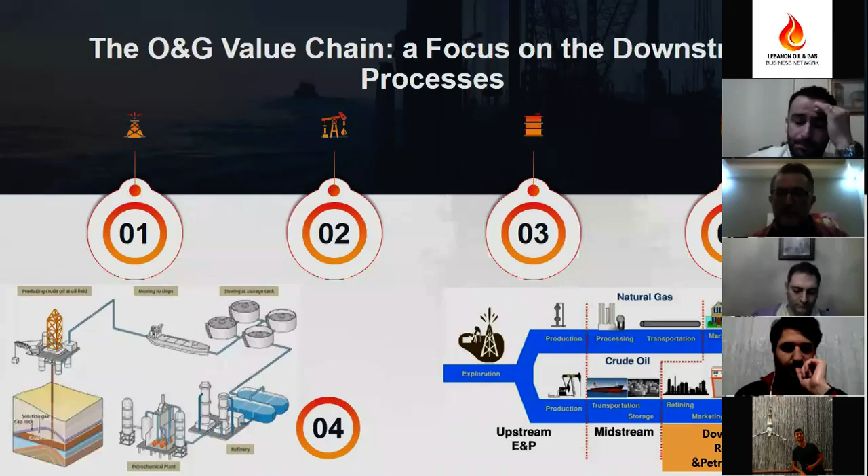However, we have some non-hydrocarbon products like sulfur, nitrogen, oxygen, and metallic components. Some of them are responsible for the deactivation of catalysts in the refinery and will cause pollution after combustion or use of crude oil. So as you can see from this introduction, crude oil in this form is non-valuable. I can't use my crude oil in my engine or in my petrochemical industry directly, so I have to treat it before going to the end-use product, whether crude oil or natural gas.

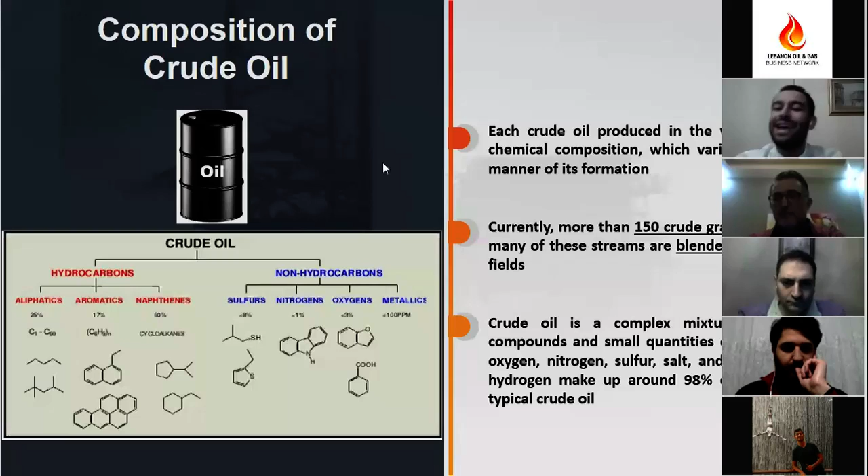So each crude oil produced in the world has a unique chemical composition, which varies according to the manner of its formation. Currently more than 150 crude grades are traded, and many of these streams are blended from 2 or more fields. So as I said, crude oil is a complex mixture of hydrocarbon components with small quantities of sulfur, oxygen, and nitrogen components called heteroatoms. Carbon and hydrogen make up around 98% of the content of typical crude oil.

So what can I do with my crude oil? Two things. First is the production of fuel like gasoline, diesel, or jet fuel, called material for the transportation sector - up to 80% of the product in the refinery is used for the transportation sector. The other part, the liquids produced in the refinery, are used in the petrochemical plant in order to get plastics, cosmetics, hydrogen, syngas, and other components.

So crude oil first enters a refinery. I get product for the transportation sector and another product called feedstocks, or the raw material that should be used in the petrochemical plant in order to get the final product.

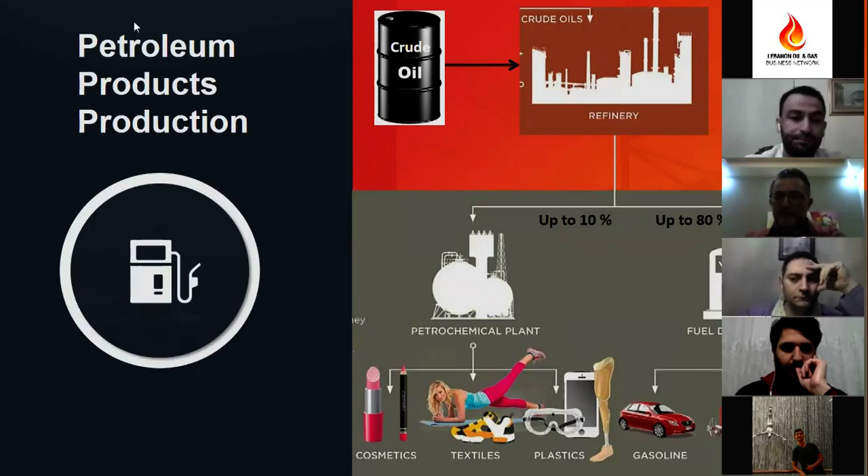Now, what is in a barrel of crude oil? One barrel equals 42 gallons. If you use US refineries, some advanced refineries, we can transform our barrel of crude oil into valuable products such as gasoline, 20 gallons, distillate or diesel, 12 gallons, jet fuel components, and other products.

So the first part of transformation is related to the transportation sector. The other part, like 6 gallons, these products are liquids used in the petrochemical industry to make a variety of chemicals and plastics. This transformation of crude oil into valuable products will depend, first of all, on the modernity of the refinery.

Which means, do I have some advanced equipment like catalytic cracking processes, thermal cracking processes, delayed coking processes? It also depends on the type of crude oil and the percentage of sulfur.

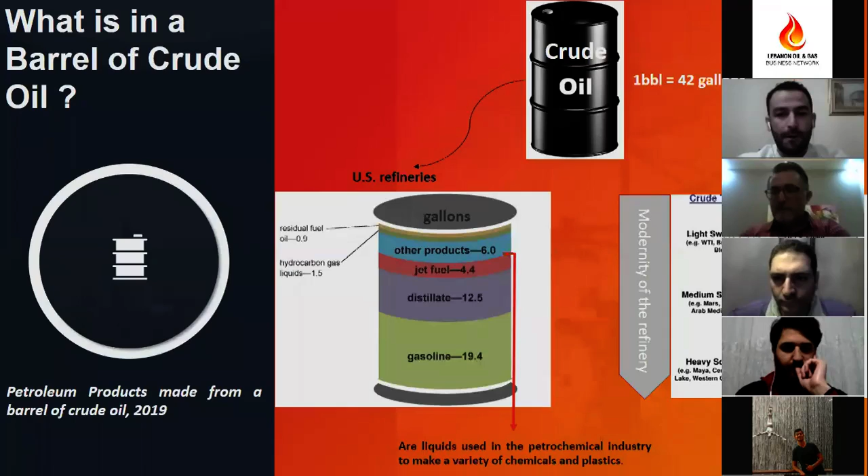Light crude oil, medium crude oil, or heavy crude oil. So this percentage of gallons in a barrel of crude oil may be different based on the type of crude oil and the modernity of the refinery.

So the first part, I repeat, how to valorize my crude oil. My crude oil is transformed into all these petrochemical products: plastics, syngas, cosmetics, rubber, etc.

The International Energy Agency estimates that more than a third of gains in oil demand by 2030 will come from petrochemicals. The other part of crude oil should be used mainly for the petroleum or transportation sector: gasoline, diesel, and jet fuel.

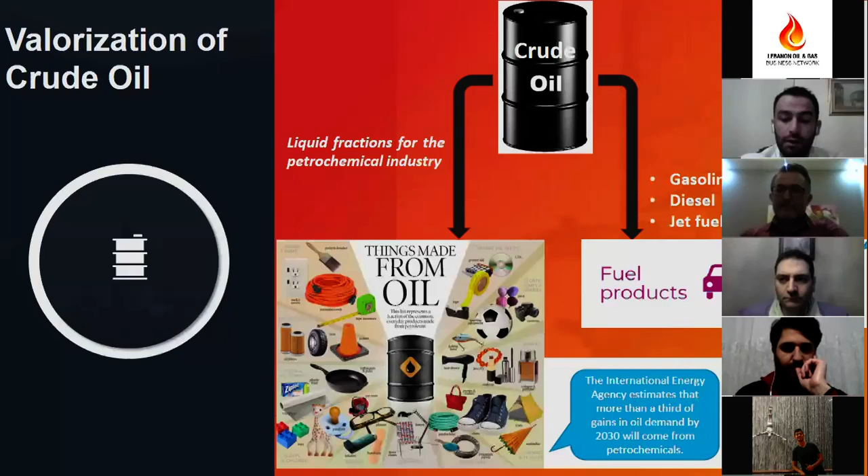How can we transform all this non-valuable crude oil into some valuable petrochemical or transportation sector product? By entering the refinery.

So regardless of the source of my crude oil, it can be light, medium, or heavy. All crude oils can enter a refinery in order to obtain all these final products: LPG, liquefied petroleum gas, gasoline, jet fuel, diesel, heavy fuel oil, and others.

Some liquids like naphtha are obtained in the refinery by a process called catalytic reforming process. Some naphtha are transformed into petrochemical products by steam reforming or steam cracking process, and this will be discussed in the coming slide in this lecture.

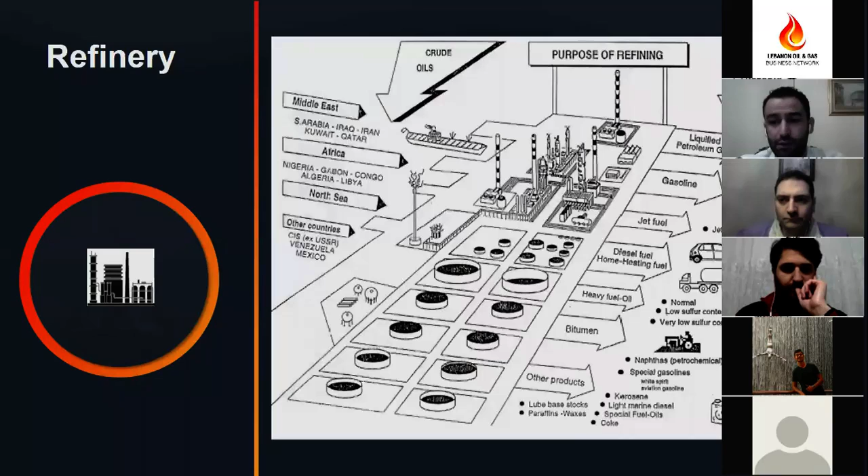So in a modern refinery, it's a mixture of different catalytic and non-catalytic processes, some physical and some chemical processes. By physical processes, I mean there is no transformation of the structure of chemical components, like the atmospheric or the vacuum distillation unit, where you separate components based on their boiling point.

However, in the catalytic cracking process, you break the molecule to transform some heavy molecules into more valuable components like diesel or gasoline. Nowadays, refineries are complex and highly integrated facilities that may contain as many as 15 to 20 process units, capable of handling a dozen or more different crudes with capacity up to almost 1 million barrels per day.

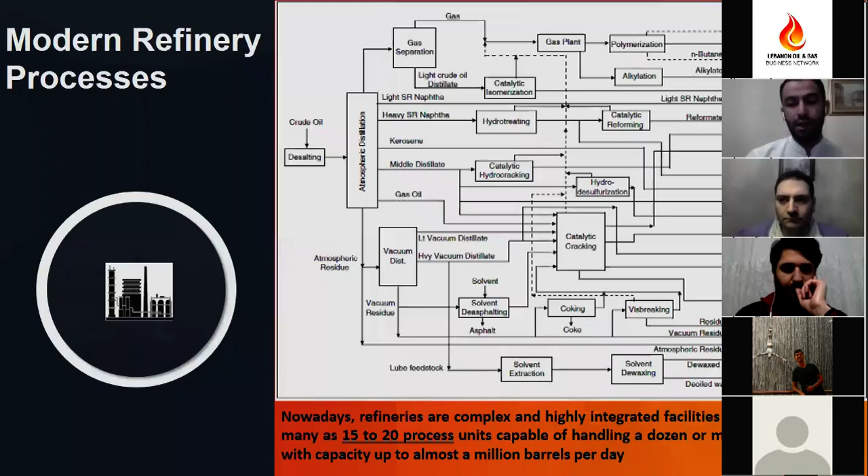So all these products, used for the transportation sector, or the other liquids used for the petrochemical industry, if I take my crude oil as a feedstock, can be treated in the refinery in order to be obtained.

So what type of refining operations are performed in the refinery? Three different types of operations: the separation processes, the conversion processes, and the treating processes.

I mean, by separation processes, I separate my feedstock of crude oil using the difference in boiling point between the components in order to obtain fractions, and that's why the process is called fractional distillation.

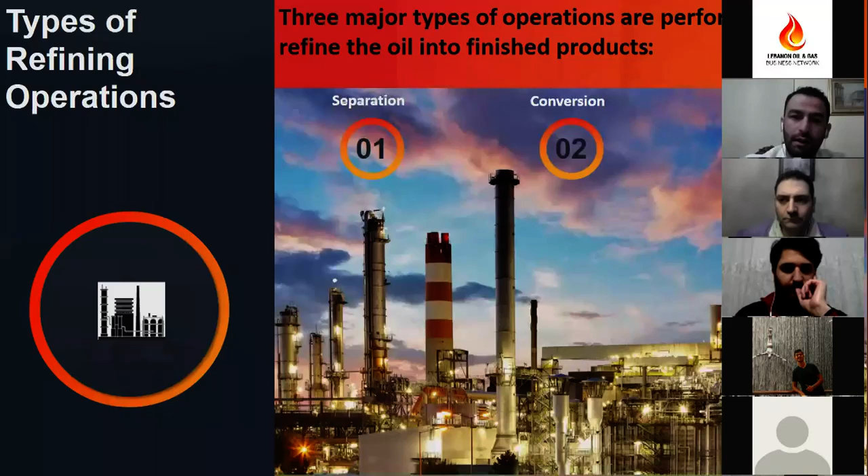Or by conversion, which means I change the structure of my components to get more valuable products by cracking, for example. And finally, the treating processes that should be used in order to remove some impurities like sulfur, metals, nitrogen, oxygen in crude oil or in petroleum fractions.

So if you look at the first type of separation processes, crude oil enters an atmospheric distillation column. Crude oil is heated to 350 degrees C, and I obtain at the output of the distillation column all these fractions like LPG, gasoline, naphtha, kerosene, light gas oil, or diesel.

But I will still have some heavy fractions at the output, at the bottom of the distillation column, called residue. This residue can't be separated in the atmospheric distillation.

That's why I move to another distillation column where I decrease the pressure in order to get more valuable products, for sure heavier than the product obtained in the atmospheric distillation column, but can be used in some catalytic processes in the refinery to obtain more gasoline and diesel, because the quantity of gasoline and diesel obtained through the first distillation column, called straight run naphtha or straight run gasoline, is not enough to be used in engine motors in the world.

That's why I need to search another source for gasoline, diesel and jet fuel by cracking processes, using this heavier component called vacuum gas oil through the vacuum distillation column.

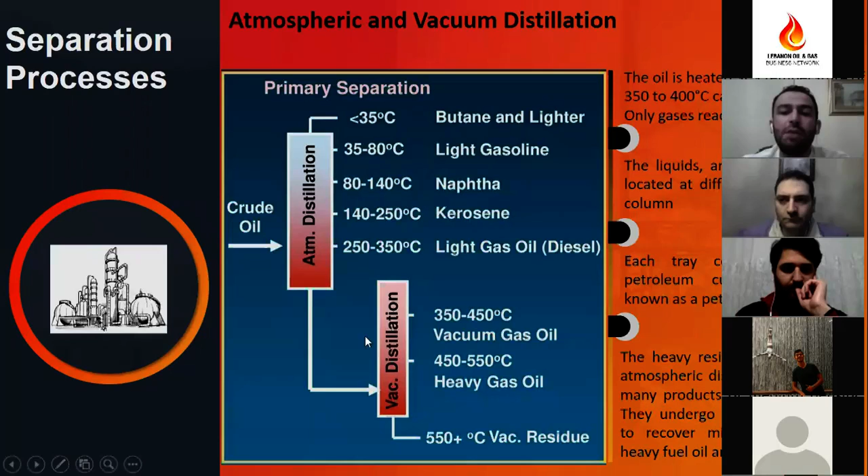So the oil is heated up to 350 to 400 degrees C. Only gases reach the top of the distillation column. The liquids are collected on trays located at different heights of the column. Each tray collects a different petroleum cut or fraction, and the heavy residual left over after the atmospheric distillation column still contains some medium density product. That's why it's important to enter this second distillation column, called vacuum distillation.

Now, what about the conversion processes? I separate my crude oil using the distillation column into valuable products. However, I can still do some cracking processes to get more valuable components, like catalytic cracking processes, FCC or fluidized catalytic cracking to get more gasoline, or hydrocracking to get more diesel. Also, I do catalytic reforming to obtain aromatic components to be blended in the gasoline pool, to increase the octane number.

Or some thermal cracking processes, to obtain petroleum coke that can be used as electrodes. So one of the most important catalytic cracking processes in the refinery is the FCC.

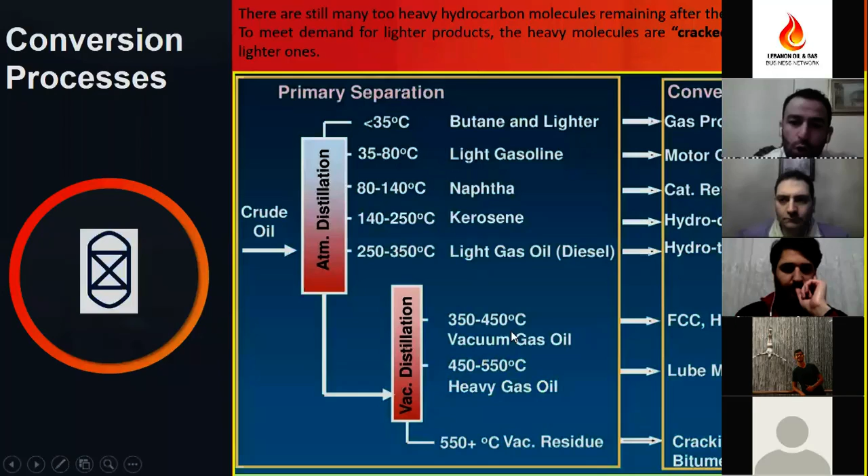As you can see, you use fractions like vacuum gas oil obtained from the vacuum distillation column as the feedstock in the reactor in this catalytic cracking. After a certain time, you get gas, more gasoline, more light cycle oil or heavy cycle oil - more valuable products from a, between brackets, non-valuable vacuum gas oil.

With time, the catalyst used - that's why it's called catalytic cracking - will become coked, a certain layer of carbon will be deposited on its surface and will deactivate it. That's why there is a regenerator where I put my coked catalyst, a kind of combustion at high temperature to remove coke. You have the output gas from the regenerator, and you can reuse the catalyst again in the catalytic reactor to obtain more valuable products.

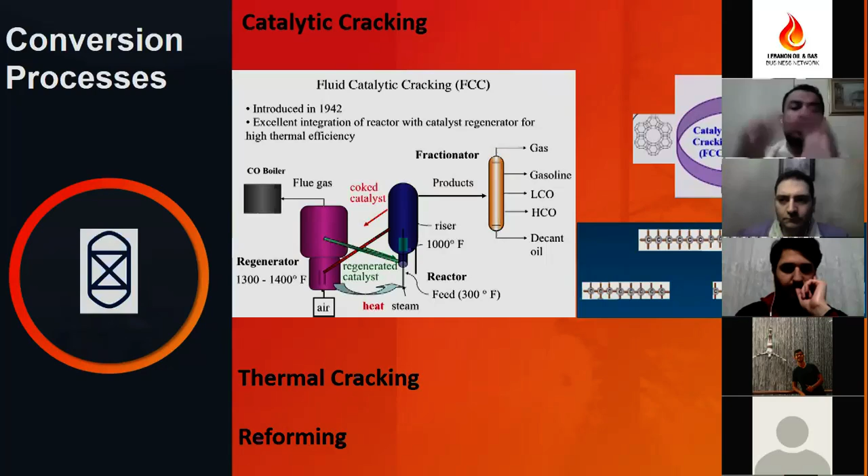Other catalytic or non-catalytic processes used in the refinery are thermal cracking processes, used at high temperature without catalyst to crack molecules, or reforming processes to change the structure of molecules refined.

Now we move to the last category of processes used in the refinery: treating, by hydrodesulfurization processes, which means removing sulfur that can create corrosion, cause air pollution, or deactivate the catalyst for catalytic cracking processes. If the feedstock contains more than 1 to 2% sulfur, it enters this unit. As you can see in the figure, here you have a sulfur component. You remove this sulfur in the reactor by adding hydrogen and catalyst to obtain a pure hydrocarbon.

So this hydrocarbon is now pure, without sulfur. However, you produce at the same time H2S gas, which should be treated by what we call a Claus process, to obtain solid sulfur from this H2S component. So treating involves removing or reducing corrosive atoms such as sulfur. For diesel, for example, I work at 370 degrees C at high pressure with hydrogen to remove sulfur. Gasoline and diesel sold in Europe cannot contain more than 10 ppm of sulfur.

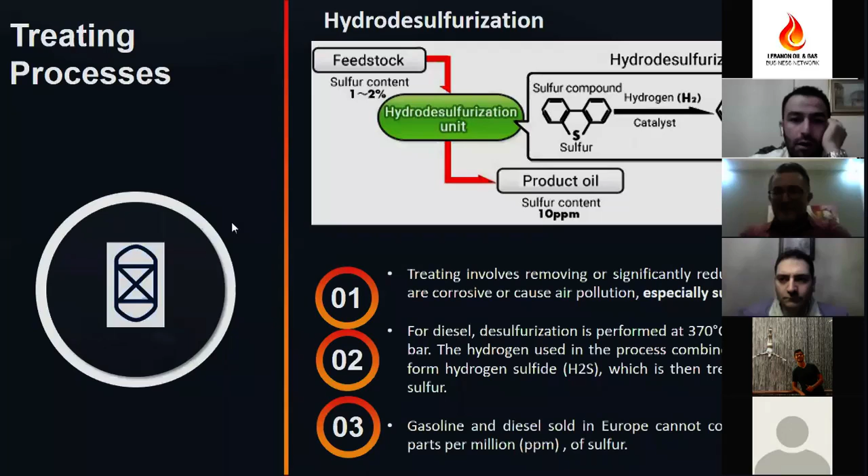Okay, perfect. So I transformed my crude oil by some catalytic process, a non-catalytic process, thermal cracking process, or reforming process to some valuable product. However, I need some specifications.

For example, if I use gasoline, gasoline 95 or 98 octane cannot be produced directly through the distillation column in the refinery. That's why I should do some blending, some modifications in order to search for the molecule that resists this what we call detonation in the engine.

I need to search some aromatic components, a branched molecule that can't be prepared directly through the distillation column. That's why I move to some isomerization process, alkylation process, catalytic process, and catalytic reformer in order to obtain this kind of molecules, as you can see here, aromatic, cyclic component, branched component, isomers that can increase the octane number in the gasoline pool.

So now I treated my crude oil, I obtained some naphtha or gasoline with low octane number. I move to some other processes like reforming in order to increase the percentages of some specific component in order to have a final high octane number material that can be used directly in the engine.

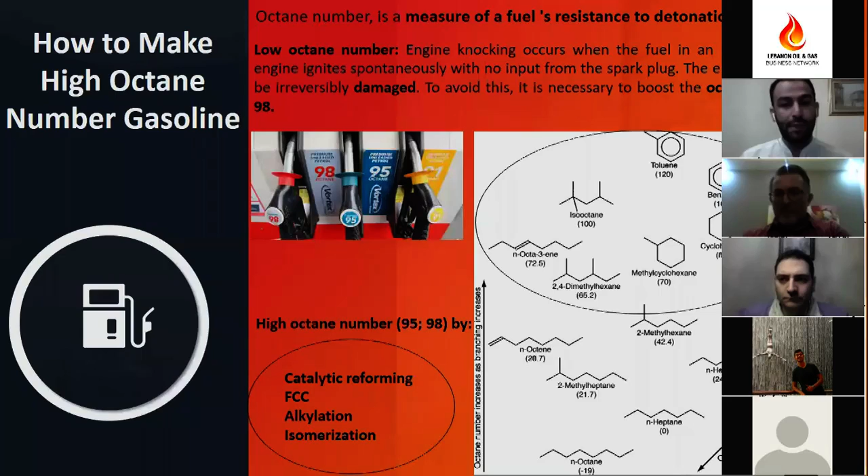Okay, I have my petroleum product. What about the petrochemical products? I have to distinguish between petroleum products obtained in the refinery and the petrochemical products.

The petrochemical products can be prepared through some liquids obtained in the refinery. So I take some liquids from the refinery, a fraction from the refinery called naphtha, and I use this naphtha to get some polymers or hydrogen or ammonia used as fertilizer, polyethylene, polypropylene, nylon, polystyrene, PVC, whatever.

However, this naphtha can't be used directly through the crude oil. So: crude oil, distillation column, naphtha, treatment of naphtha, removal of sulfur, and naphtha can be used now as feedstock, as raw material in different processes in the petrochemical industry to get the final product.

In addition to naphtha, I have my natural gas. Natural gas can be used. It's a very important source for the petrochemical industry. Methane can be used to produce syngas, hydrogen, and carbon monoxide by what we call steam methane reforming. I add some steam to my methane or my natural gas if the percentage of methane is very high.

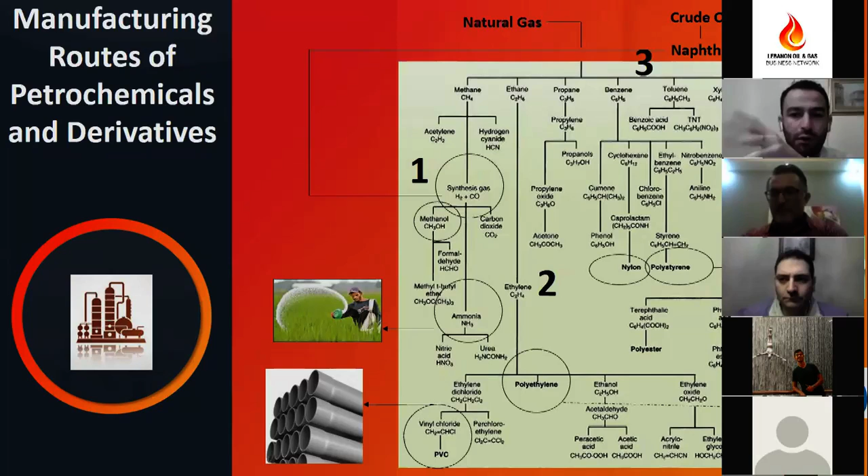Feedstock for the petrochemical industry: why hydrogen? Hydrogen can be used with CO2 to create synthetic fuel. I can also remove my CO2 by this way. I can use nitrogen with hydrogen to get ammonia.

It can be used for heating, for hydrogen vehicles, but also the most important use for hydrogen in the oil and gas industry is for the hydroprocessing. As you remember, when Robert asks me about the H2S, what is the source of my hydrogen in the refinery?

How can I obtain hydrogen H2? Hydrogen H2 doesn't exist in nature, I only have H. So there are two sources: I can do electrolysis of water to get hydrogen, or steam reforming of natural gas.

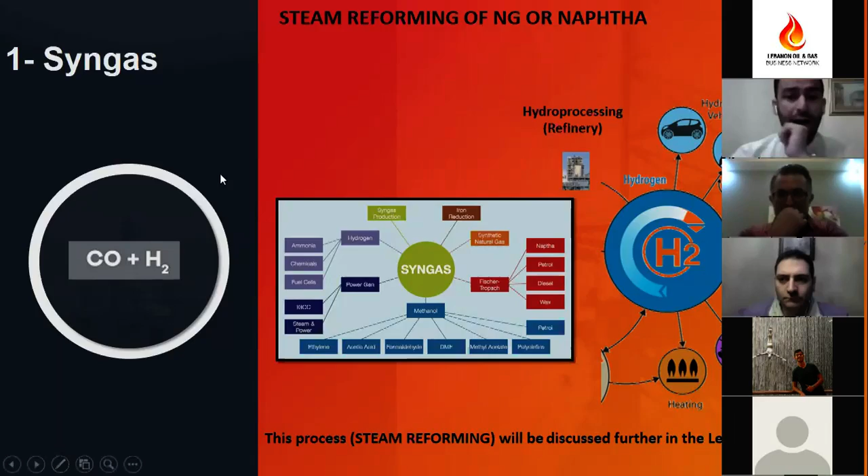Steam reforming of natural gas is the industrial process used to get hydrogen that can be used in the refinery for hydrotreatment or hydroprocessing, to remove sulfur, metals, nitrogen, etc. So this is the first category of petrochemical product.

The second one is the production of light olefins. Why light olefins? Because light olefins - ethylene, propylene, butadiene - are not found in crude oil. So I need to search for a way to get light olefins from naphtha or light gas.

Two different sources: naphtha from oil, liquid; or light gas, natural gas. Steam cracking: high temperature, thermal cracking without catalyst, high temperature, heat recovery, compression, acid removal, and then I move to a cold section.

This first part is the hot section where I get my ethylene and propylene and all the other byproducts. I move to the cold section where I decrease the temperature to transform these gases into liquids. Then, by using fractional cryogenic distillation, I get my ethylene, propylene, and other products by simple separation, because now I'm liquid.

So I move from gas in the hot section to liquid by decreasing the temperature, to transform all my gases to liquid. Then I do separation through a distillation column, and I get ethylene and propylene. You take ethylene as a pure source to get polyethylene beads, which are used to get the final petrochemical products, polyethylenes, such as bottles, or high density polyethylene used in pipelines.

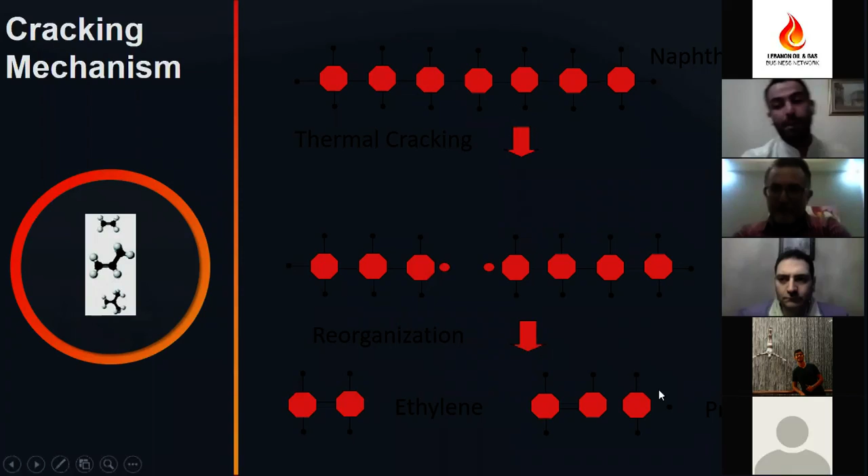Here you have a carbon-carbon bond, and here you have hydrogen. So you break the carbon-carbon bond to create radicals, one electron here, one electron here. Then after rearrangement of the molecules, you get at the reactor output some ethylene and propylene that can be separated as discussed before.

Now, what about the Lebanese case? Actually, there are no petrochemical or refining processes in Lebanon, because if you look at Zahrani refinery, it used to operate at a capacity of 18,000 barrels per day, which is a very low quantity now, but it was completely shut down in 1989.

It used to produce the following products: liquefied petroleum gas, 500 barrels; gasoline; two types of kerosene; gas oil; diesel; and fuel oil. We have some storage tanks in the refinery, two categories, with capacities for gasoline, for gas oil - 4 tanks - and for fuel oil.

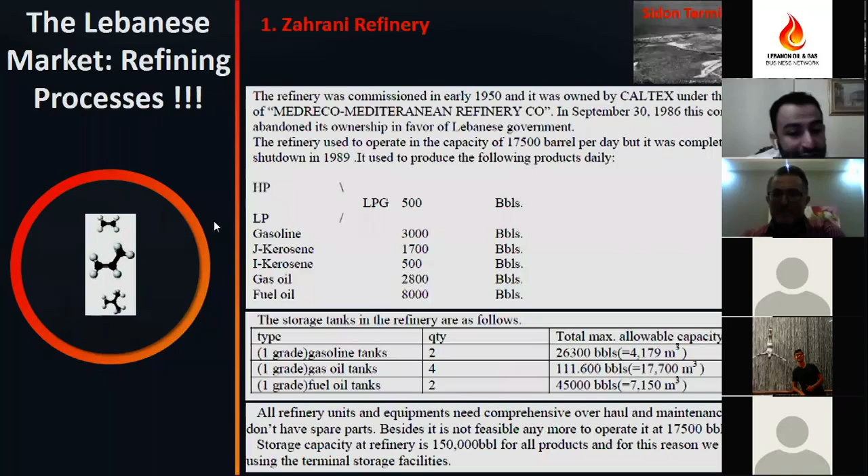Beside these, the refinery needs some maintenance; some don't have spare parts, some equipment is missing. Also, we cannot operate anymore at 18,000 barrels per day. The storage capacity of the refinery is 150,000 barrels for all products, and for this reason we are now using the terminal storage facilities, not the facilities of the refinery.

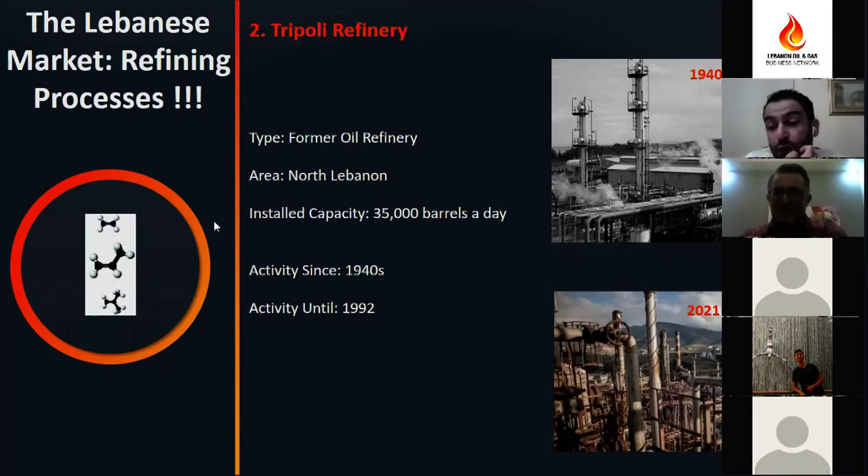The second refinery in Lebanon is also not in activity, since 1992. It started activity in the 1940s, with a capacity of 35,000 barrels per day. Sadly, both refineries are now not used to treat crude oil and obtain petroleum products.

So if you look at the market in Lebanon, you can see like 55,000 barrels of fuel oil or distillate fuel oil per day, LPG, some natural gas per day, and Lebanon's gas demand will reach 90 billion cubic feet by 2020. So we consume a lot of petroleum products, but we don't have the facilities - refineries or petrochemical industry - to prepare these petroleum products.

Imports in 2013: Lebanon's imports of oil and its derivatives amounted to $5 billion. The Lebanese market imported in 2018 alone about 5,000 metric tons of methanol that can be prepared through hydrogen, and 150 metric tons of ammonia also prepared through hydrogen, equivalent to more than $5 million US.

For this reason, we have recently published with my group an optimization study in the International Journal of Hydrogen Energy about how to optimize the Lebanese natural gas to get hydrogen or a petrochemical plant by the steam reforming process, in order to have the needed quantity of hydrogen in Lebanon that can be used in the preparation of petrochemicals like ammonia, like methanol, or that can be used in the refinery to treat sulfur, metals, or other components by the hydrodesulfurization process.

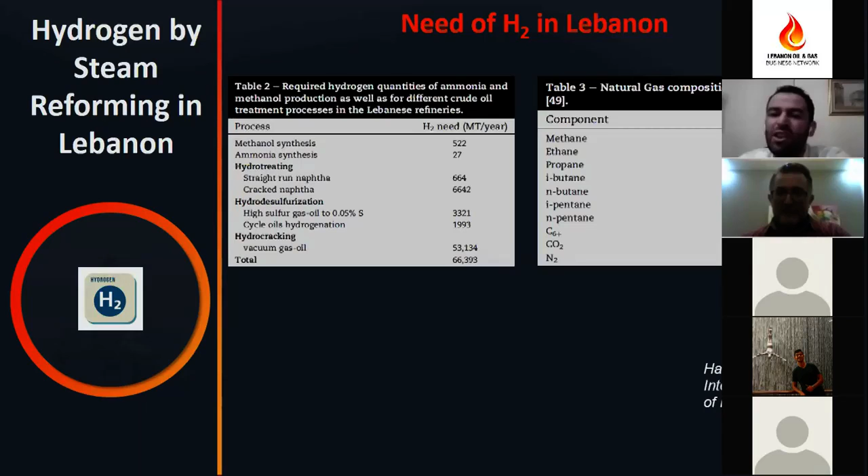We need about 66,000 metric tons per year of hydrogen to satisfy all this data. So we assumed a certain composition of natural gas in Lebanon, like 99 or 98% methane, and moved to optimize through Aspen HYSYS software using different reactors: the reformer, the high temperature shift reaction, low temperature shift reaction, and the absorber to absorb all the impurities before getting hydrogen at the output. So we did this optimization and finally got a yield of 87 instead of 66,000 metric tons per year.

A yield of hydrogen production of 87,000 metric tons per year that exceeds the needed quantity, because of the meticulous optimization of the operating parameters and the reduction of energy consumption of about 77.5%. So this paper can be directly applied if we have production of natural gas in Lebanon, if we decide to move to the transformation of natural gas for the petrochemical industry. We can use such data in order to design the steam reformer plant and to get hydrogen from our natural gas. So I think I finished for tonight.

So just a short conclusion concerning this crude oil and natural gas transformation. Please keep in mind that crude oil is a non-valuable material as is. I have to treat my crude oil in the refinery, and natural gas in a natural gas processing plant. I can't enter with natural gas to the refinery because I need a liquid form.

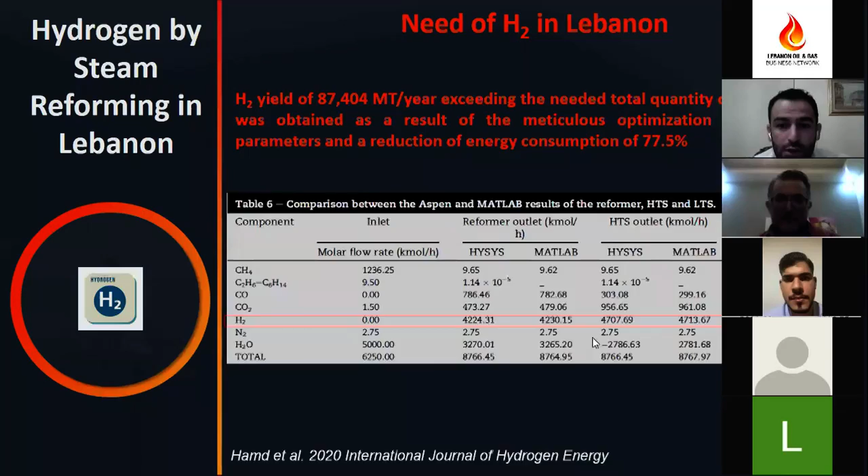Yes, for sure, for sure. If you look, if I can go back to this process, for example, here at the end of the process, you can use a kind of absorber or a unit to absorb some impurities. So the output from this unit is a clean hydrogen gas, like 99.9% pure hydrogen from the process. For sure, you optimize theoretically the process by using all the given data, all the given units.

But then in some countries like Lebanon, if I come and tell someone this is the process, and he says he won't put an absorber and will just take the output as is - I don't know, but I must put an absorber, I must put a gas process to treat sulfur. Yeah, for sure. So I do the optimization, of course, in my studies based on this regulation, for sure.

So as far as we stand right now, with the prospect of having a bigger potential for gas rather than crude oil, yes, the likelihood for development of a downstream industry based on refineries in Lebanon is somehow weak.

Considering the local demand, being a small market, and given the feedstock we're going to base our refineries on, we don't have much crude oil expected to be produced. So the bottom line is most of our production is expected to go toward export. For crude oil, we don't have this huge quantity.